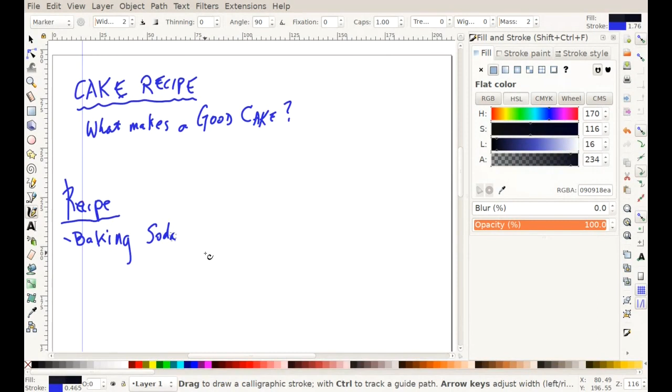It's got to be fluffy. Oh, there's a good one. I like that one. Fluffy. There's nothing worse than a cake that's like as heavy as a rock. Okay? Nice and fluffy. What else? Smell and texture. Texture. Okay, that's a good one. And what was the other word you said? Smell? Yes. That's an interesting one. I didn't think of that. What else do we have for a good cake?

Moist. Moist. Oh, yeah. I can almost taste it. Fluffy and moist. And maybe that's kind of the texture too. It's moist and fluffy. Anything else? Well, that's probably enough. For the sake of this discussion, we're going to say that a good cake is fluffy and moist. Fluffy and moist. Okay, and that's what we're going for. So let's work on the recipe then.

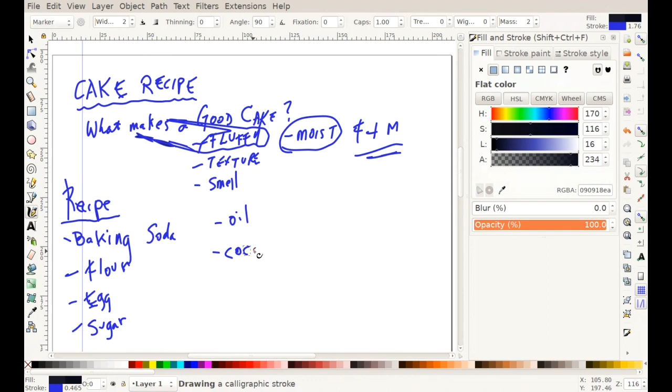So we're going to need baking soda. What else do we need for our recipe to make a fluffy and moist cake? Egg, flour, sugar. Flour, egg, sugar, you said? Yes. What else do we need? Oil. Butter. Oil. There's a good one. Come on, you cake baking guys. Gotta be some more. Vanilla or cocoa, maybe. Okay, cocoa, hey? You make a chocolate cake, or maybe vanilla.

Okay, I got a bowl. I'm gonna put some baking soda, some flour, an egg, some oil, cocoa, vanilla. What else am I gonna put in the bowl? I'm gonna mix it up. Milk. Or something more common than milk might be water. How about that? You're not gonna get very moist without any moisture in it. Okay, so, these are our ingredients. What else do we do? So after we mix it all up in the right proportions, then what? We got to bake it, right? So in terms of baking, what do we got to do to bake this cake?

It goes into a preheated oven. Okay, give me a temperature. 350. 350. Celsius or Fahrenheit? Fahrenheit. I could do Celsius. Okay, preheat, we put it in the oven. And then what? Set the timer. Okay. For how long? Half an hour. 30 minutes. Okay. All right, so here we go. We're going to bake a fluffy and moist cake. And we got all these various ingredients.

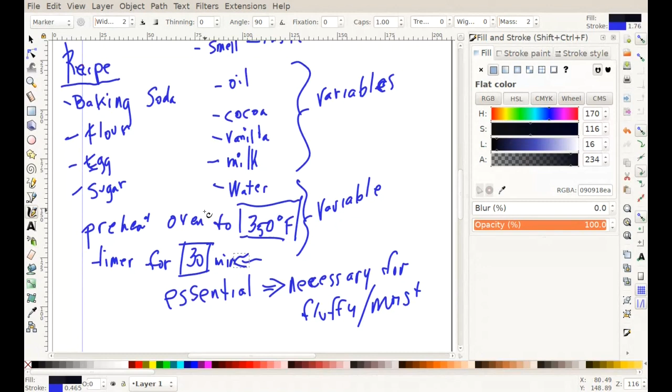Okay. So here's the whole idea of an essential variable. Anything that's essential for making a fluffy and moist cake, we're going to call it an essential variable. So baking soda. Maybe the recipe says I need 1 tablespoon. What if I skip it out? What if I don't put any baking soda in there at all?

And I don't know what's going on here with my mouse, but it's driving me crazy here.

Then you have a brownie. A brownie won't be a fluffy cake, right? What if I say, instead of putting half a cup of water, I'm going to put 3 cups of water? Maybe I'll get soup. I don't know. So let's go over each one of these and see if they are necessary for fluffy and moist.

Baking soda. Necessary for fluffy and moist, yes or no? Okay. Flour. If I put too much or too little flour, is it going to be fluffy and moist? No. Okay, so that's also essential, right? That's another essential variable in our cake recipe. What about egg? What if we forget to put the egg in it? It's probably an essential variable too.

Essential, essential, essential. Sugar? Is that an essential variable for making it fluffy and moist? No. Maybe not. Maybe all that is going to do is help us out with the taste, make it tasty, okay? But it doesn't make it fluffy and moist. Oil, fluffy and moist? I think so. I'd call that essential.

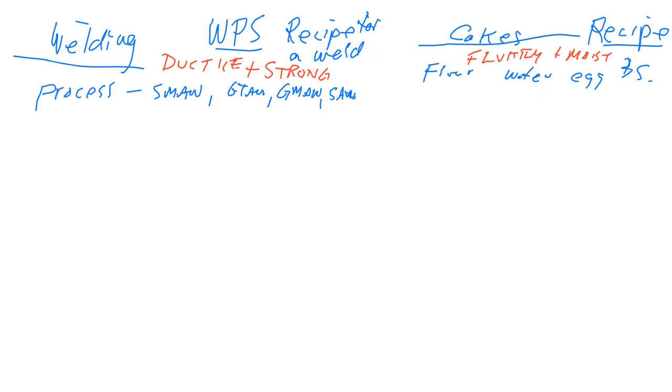So ductile and strong. The process that we're going to use is one of the important things about a weld procedure specification. The cake process might be, I'm going to do it in a toaster oven, or a regular oven, or maybe I'm going to bake the cake in a microwave oven. I think there are microwave cake recipes. So that would be sort of the process.

Whereas in welding, we've got shielded metal arc welding, gas tungsten. So you can see how the type of process we choose for the welding is going to affect the weld procedure, because you're not going to have the same variables if you're doing submerged arc welding compared to oxy-fuel welding.

Is current. So if it is an arc welding process, and really that's all that we're concerned about right now, we're not going to worry about oxy-fuel welding or laser beam welding or anything like that. Really we're talking about arc welding. And arc welding gets the heat from the heat of the arc, which is quite intense.

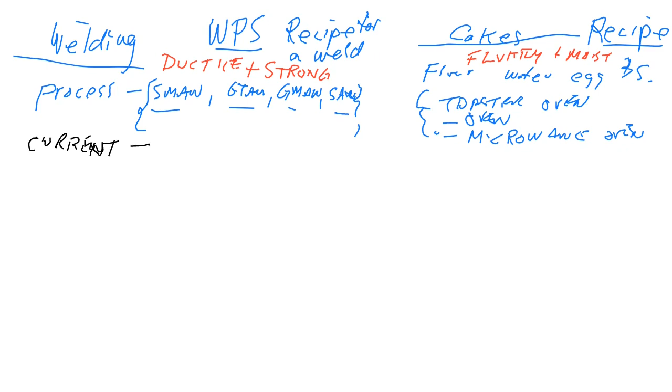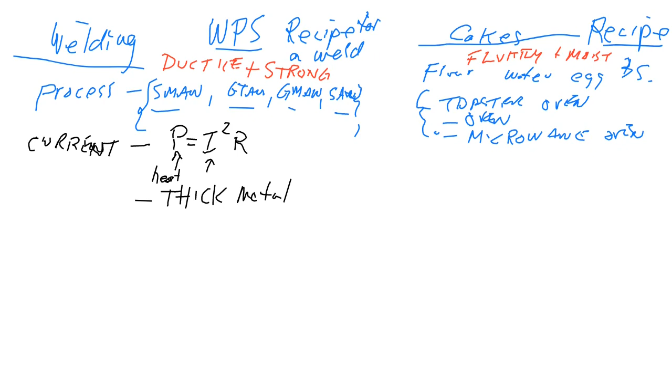So current, we know that power is equal to I squared R. So obviously the amount of current is going to affect the amount of heat that is produced. And so if we've got very thick metal, we're going to need more heat, which means more current. Just like a recipe is going to say the oven temperature, our weld procedure says how much current we're using.

Then the other thing about current is, is it going to be AC, alternating current, or is it going to be DC current? And if it's DC current, we're going to have an electrode. Is the electrode going to be positive or is the electrode going to be negative? So we have two types of DC. We've got DC electrode negative, and we've got DC electrode positive. So this is also going to be stipulated on our weld procedure. Is it AC? Is it DC? And if it's DC, is the electrode negative or is the electrode positive?

So DC electrode negative has a slang term, and the slang term is straight. And you'll still hear welders using the word straight. And DC electrode positive is what we call reverse polarity. Or welders just say the word reverse.

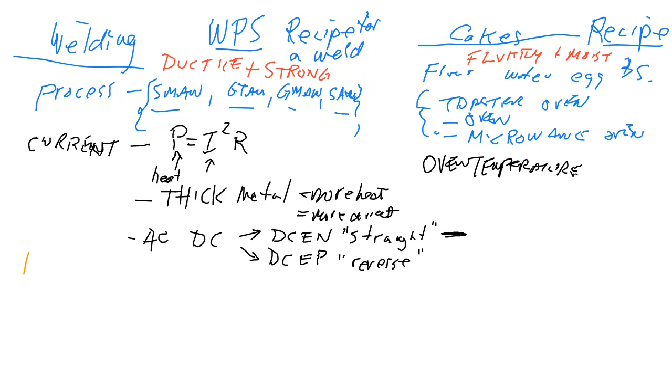Now, what else do we have in our weld procedure specification? It's going to be the type of parent material. And so, we can have low carbon steel or mild steel like we see with boilers. We can have stainless steel. We can have medium carbon steel, high carbon steel, titanium, all kinds of different parent materials.

And if we are doing this electric arc welding with a filler material, we can have various types of filler rods. And actually, I shouldn't say rods, because a rod is a fairly short piece of metal. We can have a continuous roll of filler metal that's automatically added. So we can have various filler materials. And so this would be rated according to their chemistry. Low, mild carbon steel, high carbon steel, whatever, alloying agents, and also the strength of the filler material.

So generally speaking, a weld procedure specification is going to say that we've got a particular material that we're joining to another material, and the filler material is this, and so each one of those three materials is going to be identified in the weld procedure specification.

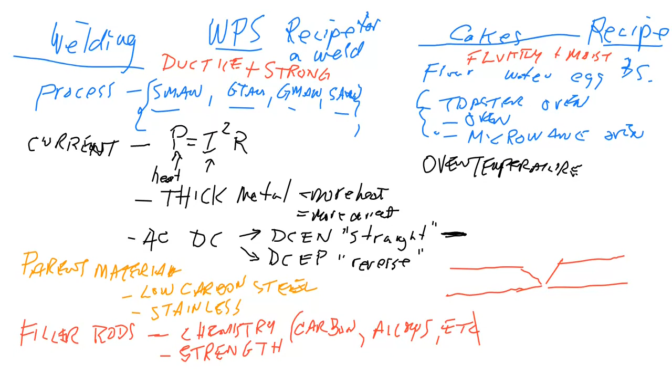The next thing, we'll have a joint type. That will also be in a weld procedure specification. So we might have a groove weld. We might have a fillet weld. So the groove weld, it's going to be what kind of groove? Is it going to be a V groove? Is it going to be a U groove? Is it going to be a J groove? All these various types of weld joint preparation. And is there going to be backing? Again, this is all going to be specified on a weld procedure specification.

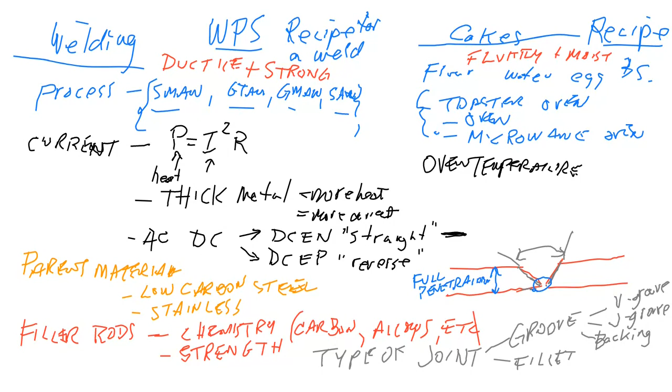So you can see here is a little diagram of a groove joint, and it's got particular joint preparation in the form of a V. So what they've done is they've taken both pieces of metal and they've ground them so that we get a particular angle, and so then what they're going to do is weld it. And so the first pass is going to be down there, and what we want to get is full penetration. And by full penetration, what we mean is that the weld material penetrates through the whole thickness of the parent material.

Now, some people call it the base material, but I like to use the word parent material because that's what ASME uses. We call it the parent material. Parent meaning it donates some of its metal to the final weld. So the first pass that goes in is called the root.

And we might have a backing plate. And if we've got a backing plate, then the weld procedure specification has to say, oh yeah, there's going to be a backing plate behind the weld. If there's no backing permitted, it'll say on the weld procedure specification, no backing permitted.

Then what we're going to have is subsequent passes to complete the weld. And so usually what we have in a weld procedure specification is a diagram of the weld. The weld procedure specification is also going to have to say not only what type of material we're welding, but it's going to have something about the thickness range usually. So add it over here.

With the thickness range, we find that there are different kinds of requirements to making a ductile and strong weld. It depends upon how thick the material is. So very, very thin material is going to require a little bit of heat, and it's going to require a lot of skill so that you just don't burn holes through the parent material. Okay, so if we're just making a weld on a thin piece of material, a lot of skill is involved in that.

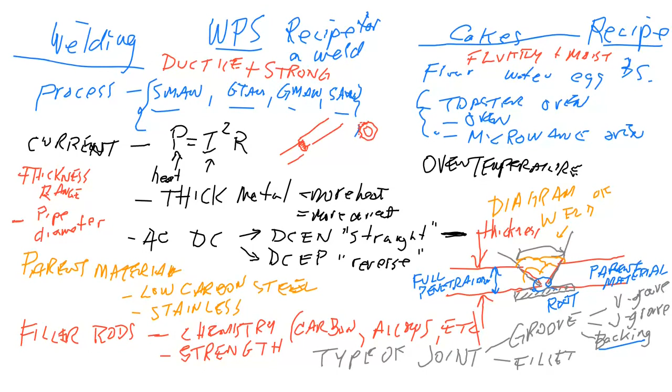Now, sometimes we've got a procedure specifically for welding pipe. So in addition to all of these things, we'll see things like pipe diameter. Again, there will be a range. And what we find is that if somebody is welding pipe, it's more difficult to weld a small diameter pipe than it is to weld a large diameter pipe. With a small diameter pipe, I've got to somehow get all the way around that pipe. It's hard to work around such a very small pipe.

But if it's a big pipe that I'm welding, it's much easier to weld. It's hard for me to explain, but maybe it's a little bit easier for you to visualize that a large pipe is easier to weld than a small pipe.

So, to sum this up, a weld procedure specification is a recipe for making a weld. And in that weld procedure specification, there are certain variables that are essential and certain variables that are non-essential. The essential variables are the things that we've listed here: process, current, thickness range, diameter, parent material chemistry, filler rods, type of joint preparation, that type of stuff, okay? What it means is if I change one of those things, it can change other things.

Just like I was saying, hey, what if we took the cake oven temperature up to 450? And somebody says, well, then we have to lower the cooking time. Okay. And they said, well, what if you didn't lower the cooking time? Oh, you set the thing on fire, right? Or, what if you didn't put any egg in it? Well, maybe there are cake recipes where no eggs are permitted. Maybe for people who have egg allergies, you could make a different recipe that doesn't have eggs.

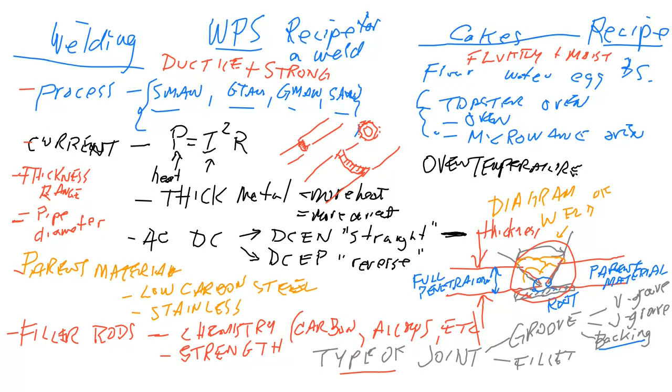If I change any of these things, if I change the current range, if I change the thickness range, if I change the parent material composition, if I change the type of filler material, if I change the type of joint preparation, that's fine. I'll still be able to make a decent weld, but what I need then is a new procedure. I need a new recipe because the old recipe doesn't qualify anymore. Does that make sense?

With a weld procedure specification, what it does is it lists all variables, and the welder has to follow it, because if you don't follow the procedure, you're going to get a lousy weld. What's the sense in having a cake recipe if you don't follow it? You got a cake recipe, but I'm going to put it in the oven for 8 hours at 800 degrees Celsius. You're going to make a hockey puck or a fire. You're not going to make a cake, right? So you need to follow the recipe.

Same with a welder. Welders have to follow a weld procedure specification. If they don't follow the weld procedure specification, they make a lousy weld. And I should mention, lousy welds are dangerous. So if you got a bad weld on a boiler and the boiler's under pressure and the weld lets go, people die.

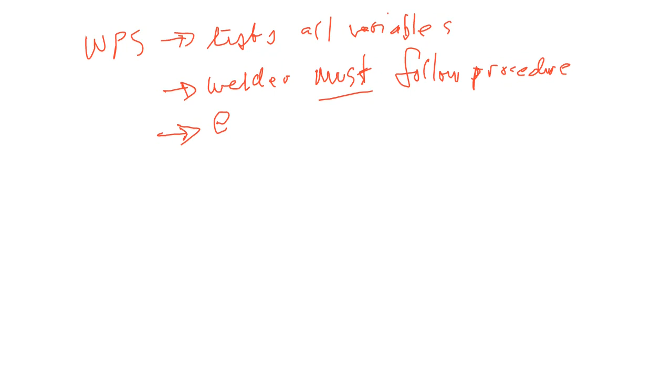So the weld procedure lists all variables. Welder must follow the weld procedure. So if a variable is changed, say an essential variable change, it means that we need a new procedure. Just like we saw with the cake, if I decide to use a different type of flour, then I need a new recipe.

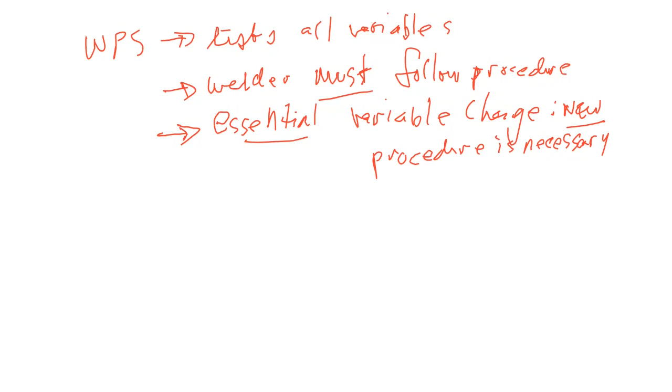Okay, so now the next thing is evidence. How do I know the weld procedure is going to make a decent weld? Well, let's think about this. Let's go back to our cake, and let's say that I have a bakery, and the bake shop owner makes their own recipes, okay? And this bake shop owner gets an idea for a new type of cake that's going to be so fluffy and so moist, and people are going to be dying for this cake.

So imagine a world where if you come up with a new cake recipe, you have to get it inspected by a third-party inspector. So imagine, let's say, the Great Canadian Bake Off or the Great UK Bake Off, and these bakers come and bake their cakes and bring it to this Great Canadian Bake Off. I don't know if anybody's seen this type of show on television. And then this third-party inspector comes along and tastes all of the different cakes and says, well, this one here is nice and fluffy and moist, and that's the winner, right?

So imagine a world where if you have a cake recipe, you cannot actually bake that cake until you've proven that it's a good recipe. So here I'm the owner of the bake shop, and I have a new recipe, and I think it's going to be a great recipe, but I don't know for sure. And I'm going to look for third-party validation. And this third-party validation is going to give me evidence that says, yeah, that cake is a nice and fluffy, moist cake.

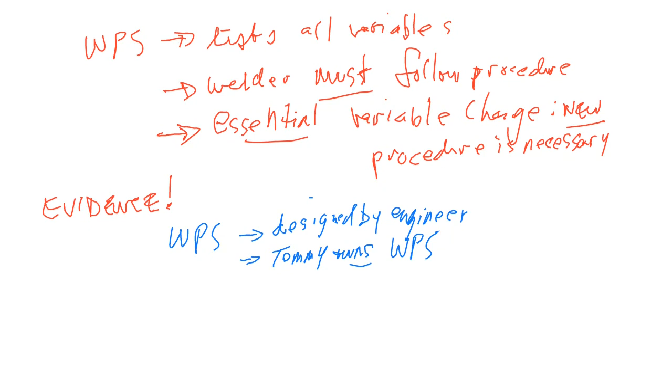And there's certain weld test centers. I think that there are sort of third-party testing centers around the province, and I'm going to pick the best welder that I got, the most experienced welder, because what I want to do is prove that the weld procedure is good. I don't want to prove that my welder's a lousy welder. I want to take the welder out of the picture. So I take my best welder, send them off to the weld test center, and the examiner there is going to watch that this welder follows the procedure exactly and does not deviate from it.

So it's going to say that there's a particular thickness. It's going to say that this is the current range. It's going to say that this is DC electrode negative or DC electrode positive. It's going to say that I'm using this type of weld electrode. It's going to say I'm going to weld in this position, whatever. And the examiner is going to make sure that the welder follows all of that stuff.

Then after the weld is complete, the weld examiner is going to take this completed weld and is going to cut it up into coupons. And this is not a coupon like you use at the store when you want 50% off of your bag of potato chips. This is a different use of the word coupon, and a coupon is just a sample that's being used for testing. And then this tester may have their equipment in-house, or they may send it to a third-party inspector. But if they do it in-house, they're going to take that weld coupon.

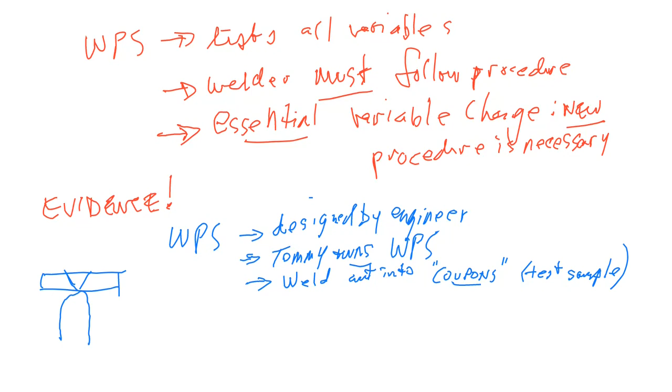And so then there's the weld joint. And they're going to do what's called a guided bend test. So they're going to basically apply force, and they're going to bend it around a mandrel right on the weld joint. And it's going to elongate along the outside edge, and so they're going to be testing for ductility. So they're going to do a couple of these guided bend tests, and probably also do a tensile test, and they'll probably also do radiographic testing. And they're looking for defects and flaws. They're looking to see that it's as strong as the parent material with the tensile test. They're going to see that the resulting weld is nice and ductile, that it's not brittle, and all that kind of stuff.

So when the test results come back, they document everything. They document the welder name, time, date of test, current range, process that was followed, test results of the guided bend, of the tensile test, of all of this kind of stuff. And basically, does the weld pass or does it not pass? And if the weld passed all of these tests, name of examiner.

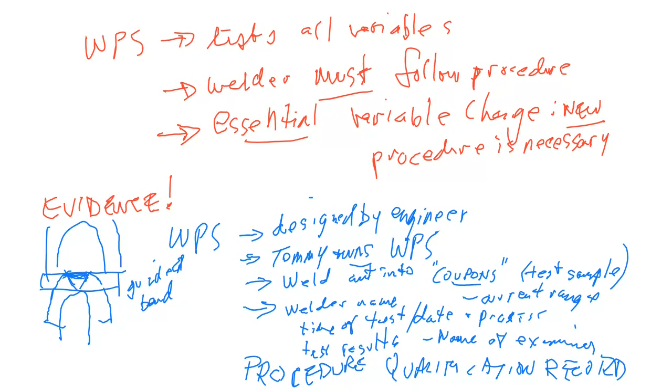If the weld passes, we end with what's called a procedure qualification record. So a procedure qualification record is tied to a weld procedure specification. Remember, we have not tested a welder. We have not tested a baker. Okay, we have tested a recipe. We've tested a weld procedure specification. And the weld turned out to be a good, ductile, strong weld. So the evidence is the procedure qualification record, or we call it a PQR.

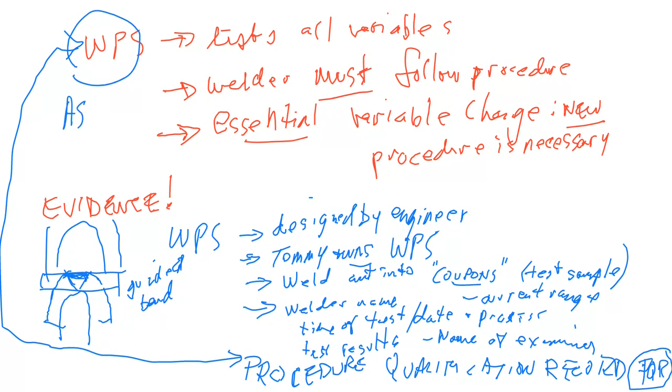And I should let you know that all of this stuff is in ASME Section IX. But it's also in so many other codes. So for example, American Welding Society has all of this stuff as well. ASME probably adopted most of the AWS stuff for procedure qualifications and weld procedure specifications.

Okay, so to summarize what we've done so far, we've got a weld procedure specification, which is our recipe that includes essential and even non-essential variables for making a good quality weld. And we have to prove that it actually produces a strong and ductile weld. In order to do that, we have to go to a testing center. We're going to get a very good welder to actually perform the weld.

And then that weld is subject to a number of destructive and non-destructive tests as evidence that it makes a strong and ductile weld. And this is kept on file as a procedure qualification record, and what we will do is actually staple the two together. And the weld procedure specification might have a number. Maybe Tommy's number is WPS 3001, and the PQR will say on it for WPS 3001. So they cross-reference each other. So there's no question about what the procedure qualification is qualifying.

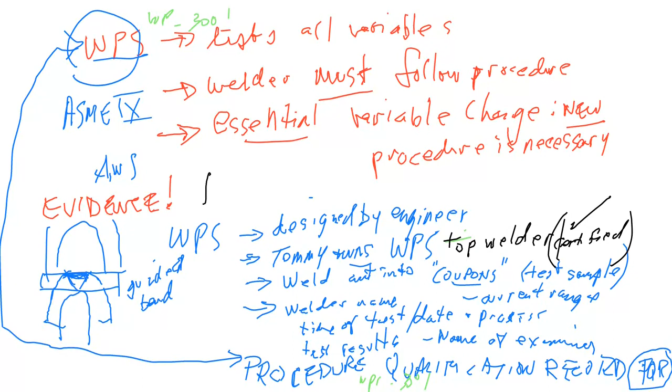Which brings us to the next thing, welder performance qualification. What we've done so far is procedure qualification. And in procedure qualification, you get an engineer. Well, first of all, you have to have a need for it, right? So let's say that I'm Tommy's Welding and somebody comes up to me and says, I got this titanium and I need to weld this carbon steel nozzle onto this titanium. Can you come up with a weld procedure?

So Tommy says, yeah, sure, we'll come up with a weld procedure, and contacts the engineer that works for Tommy's Welding. And the engineer works real hard and says, okay, you need this type of filler material. The best process for doing this is going to be GTAW. And so it's going to be a fully manual process. And based upon these thicknesses of the nozzle and of the plate, you're going to have to use this amount of current, and blah, blah, blah, right? It's all these types of things that the engineer considers in designing the weld procedure.

And then the weld procedure comes back from the engineer, and then I take my best welder, Suzanne. And Suzanne, by the way, women tend to be excellent welders because they have very good control, better fine motor control than men. So I send Suzanne off to the weld test center, and she does the test, and they cut it up into coupons, and they pull it, and they twist it, and they turn it, and they do NDE and whatever. And it turns out to be ductile and strong, so we get a PQR that supports it. Now Suzanne is automatically qualified to do that particular weld going ahead in the future.

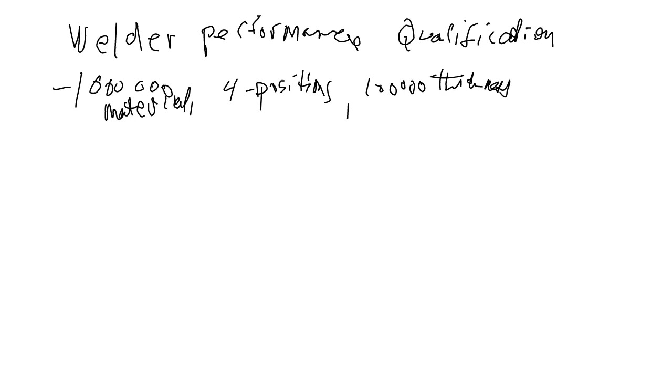So, you know, lots of welders, you talk to a welder, and the welder says, yeah, I got all my pressure tickets. All your pressure tickets? You got all of them? Well, let me see. Last time I checked, there are, you know, 1 million different materials out there. And there's 4 different weld positions. There's 100,000 different thicknesses. There's 1,000 different types of joints, and combinations of backing and not backing and all this kind of stuff.

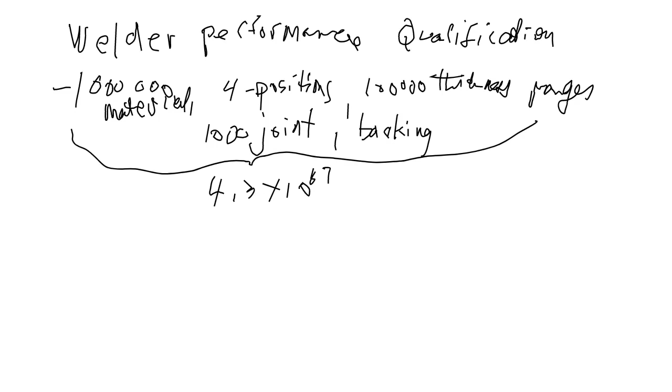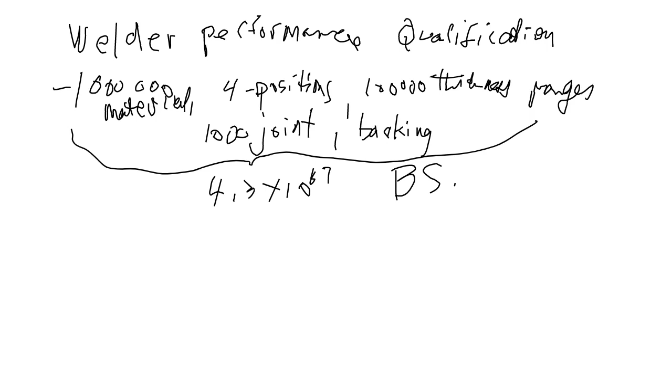And so you are going to tell me as a welder that you are qualified to do 4.3 times 10 to the 67 possible combinations and permutations of different materials and different positions and all this kind of stuff. You tell me that you're qualified to do every single one of those welds. What it really means is it's BS. Welders weld to a specific weld procedure specification.

So a pressure welder may weld to what's called, now this is the bread and butter one, a P1 to P1, F3, F4, 2G, 5G, 6G, and test on a NPS 4 Schedule 80 pipe. And then you're going, what on earth does that mean?

This is a very, very common weld ticket. Okay, this is a license. So what we're going to do is we're going to send a welder into the weld test center to prove that he or she can do this weld correctly. A P1 material, if you recall from ASME II-D, is a mild carbon steel. And so mild carbon steel behaves a certain way, no matter whether it's SA-53 pipe or SA-106 pipe or whatever. If it's a mild carbon steel and it's categorized as a P1 material, this welder, if successful, can weld on any P1 pipe.

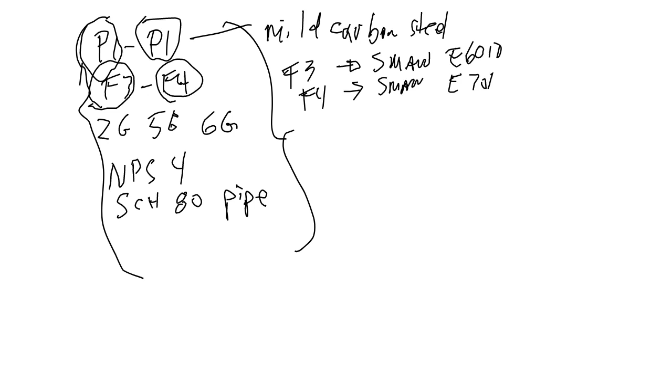F3 refers to the welding electrode. So F3 refers to shielded metal arc welding. And you don't have to know this by heart. What you need to know is the principles involved here, okay? F3 is an SMAW, shielded metal arc welding electrode, E6010 electrode. That's an F3 weld. An F4 weld is shielded metal arc welding, E7018 electrode.

2G, 5G, and 6G refers to a weld position. So if I am welding a groove weld, it's given a G. If I'm welding a fillet weld, it's given an F. So I could have 2F, 5F, 6F, but I don't. I've got 2G, 5G, 6G. So these refer to the positions. And so a welder can weld in the flat, can weld in the horizontal, can weld in the vertical position, and can weld overhead.

Of these, which do you figure is the hardest? Okay, the toughest one is the overhead. The easiest one is in the flat position. And so 2G means horizontal. The vertical position is 5. And if I have a 2G position and I have a 5G position, that is the same as an all-position weld. So 2G, 5G gives me all positions. So what I'm going to say then is the welder is going to test for doing a weld in all positions. And 6G is another way of saying an all-position weld.